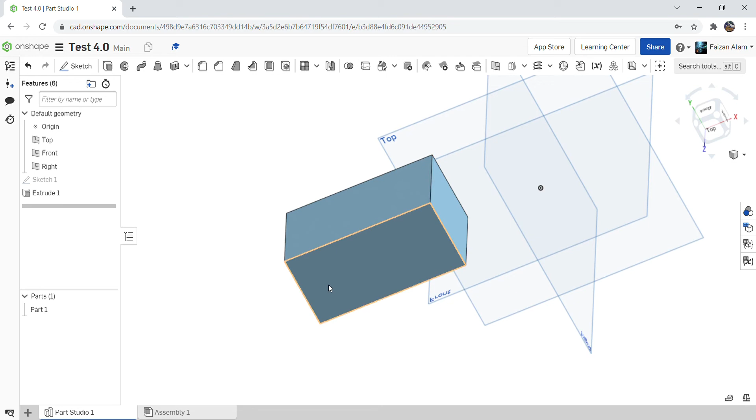Alright, so continuing from where we left off, in this prism that you have now, you can do various things to it. You can cut a hole into it as well. What you'll have to do for that is select the face. Say that we chose this face, right?

And if you want, let's sketch a circle on it. After we select the face, we can just sketch a circle, and again it will be blue. So to make it go from blue to black, we have to define the diameter of the circle, which is the length from one side of the circle to the other.

And over here, let's say that's 0.02, from there to there, and then let's dimension it from each side. So we'll give it 0.0125, and then here. Oh, alright. If you want to go back, just right-click on your mouse, and then press Escape Dimension.

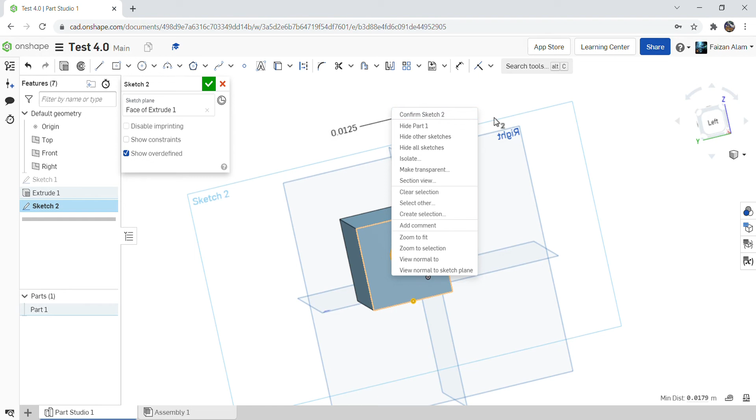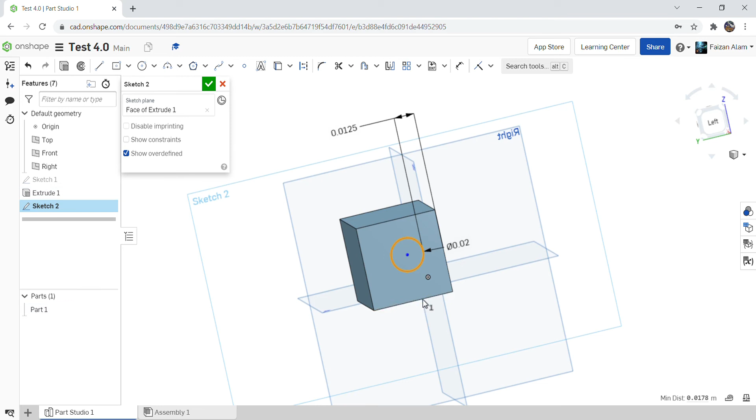Oops, that's a bad idea. Okay, there we go. Just need to re-click that point if that happens.

Okay, from here to there, we show 0.0175. And there you go, now you have your circle.

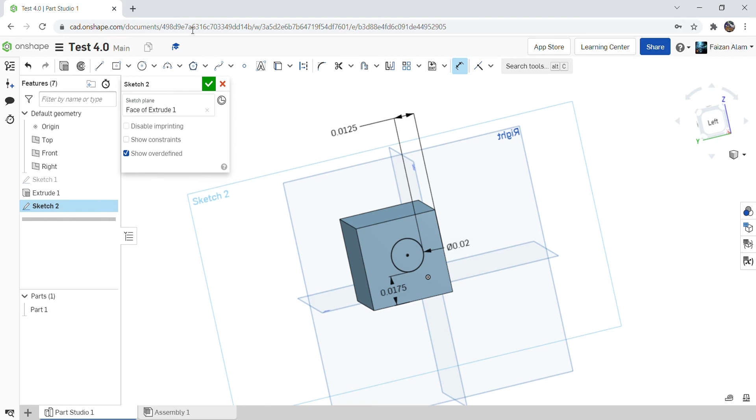So, to make a hole in the rectangle, or you can also extrude it, but to make a hole in your rectangle or prism, just select the remove option in your extrude table, and then you can say how much you want it to go down.

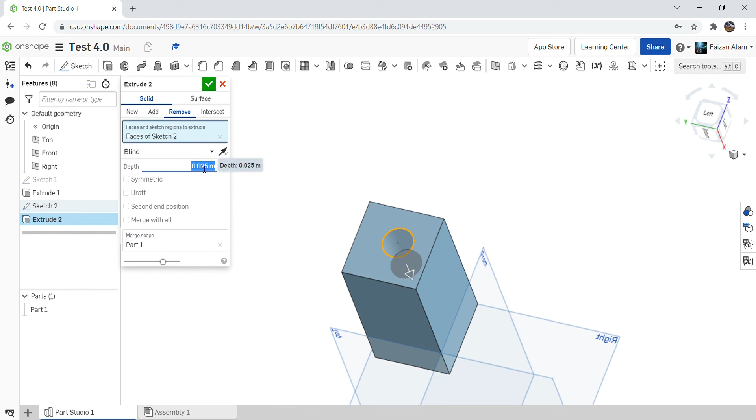So let's agree with this and say it's 0.025. And if you click the check mark, it will give us a hole that is 0.025 meters in depth, and there you can see right there. Okay.